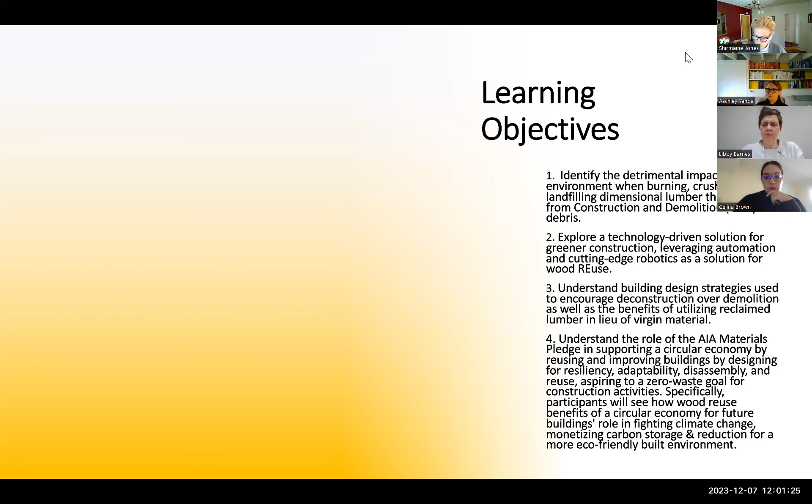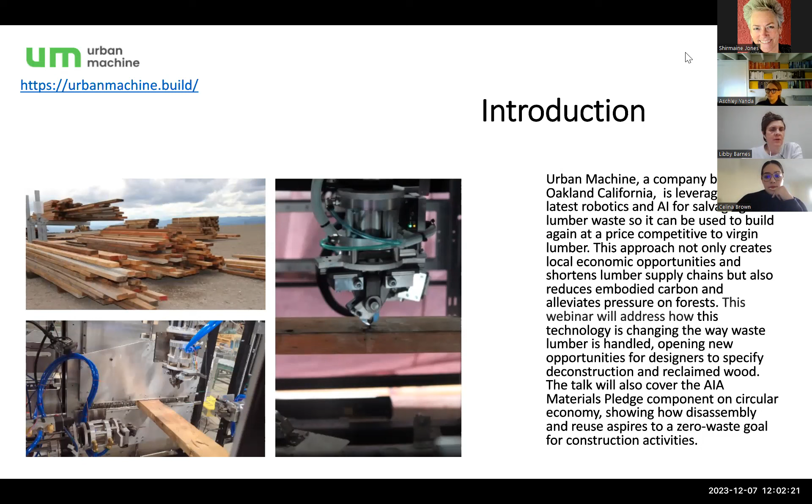Urban Machine, a company based in Oakland, California, is leveraging the latest robotics and AI for salvaging lumber waste so it can be used to build again at a price competitive to virgin lumber. This approach not only creates local economic opportunities and shortens lumber supply chains, but also reduces embodied carbon and alleviates pressure on forests. This webinar will address how this technology is changing the way waste lumber is handled, opening new opportunities for designers to specify deconstruction and reclaimed wood. The talk will also cover the AIA Materials Pledge component on circular economy, showing how disassembly and reuse aspires to a zero waste goal for construction activities.

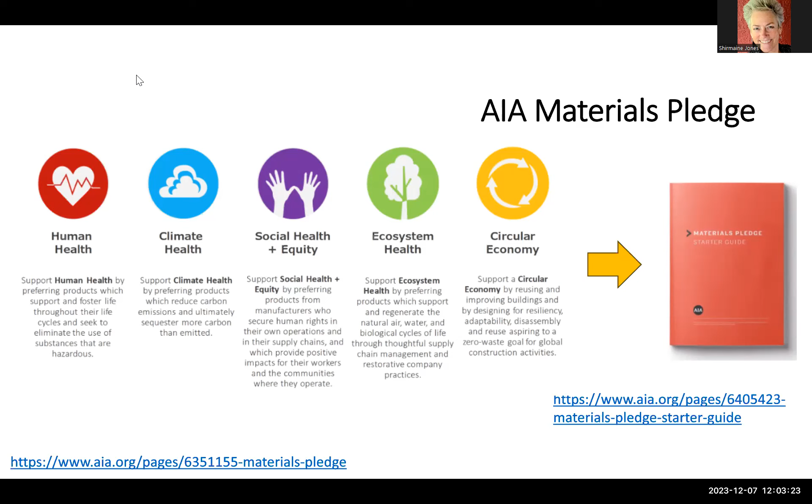Circular economy. The Ellen MacArthur Foundation, a nonprofit promoting circular economies, lays out 3 principles for circularity: eliminating waste and pollution, circulating products and materials at their highest value, and regenerating nature. The building sector, as it is structured today, remains largely intractable on all 3 principles. Construction and demolition debris amount for about 30% of all waste produced globally. It is estimated that 75% of all the waste still has some residual usefulness.

This suggests 2 avenues of opportunities for the building industry: innovate in the decommissioning process, removing assemblies or systems in ways that leave them intact for other immediate applications. The second is to build more horizontal integrations with other sectors so we can become part of their circular loops of materials and they become part of ours.

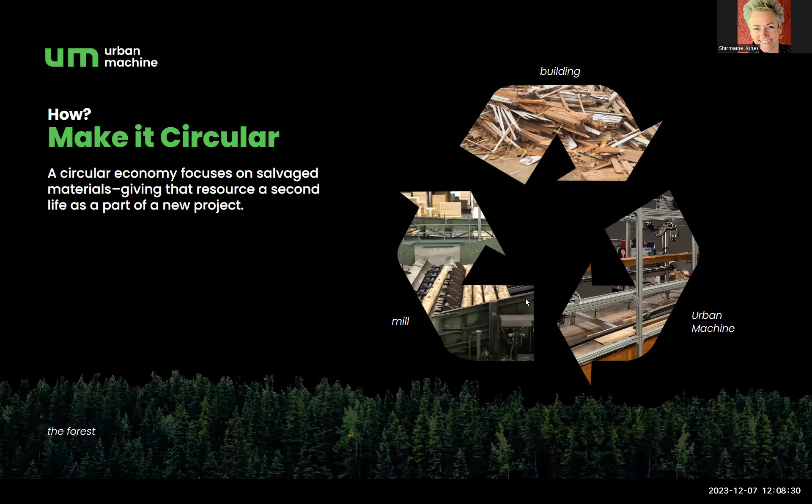As I mentioned previously, dimensional lumber from C&D waste is currently either landfilled, burned, crushed for mulch, or reclaimed and kept in its dimensional form, all of which factor into sequestration.

When the wood is disposed of in a landfill, it often decomposes faster than indoors due to the fungi and insects. And when wood breaks down, carbon dioxide is not the only greenhouse gas released back into the atmosphere. Methane, which is 25 times more potent than carbon dioxide, is also present, making it a much more immediate global warming effect.

When wood is burned, it's no longer carbon storage, of course, and you also increase carbon dioxide concentrations in the atmosphere, actually by more than if you had used fossil fuels, and thereby contribute to climate change.

When wood is ground into mulch, the mulch will continue to store carbon, which is good, but not for as long as reclaimed wood because of the smaller size. Wood mulch also tends to decompose faster than solid wood.

So that brings us to the final method, our preferable method, which is to reclaim the wood and keep it in its dimensional form. It's suitable for reuse. It can be put right back into a new project. And of course, the reclaimed wood gets to keep its carbon storage role.

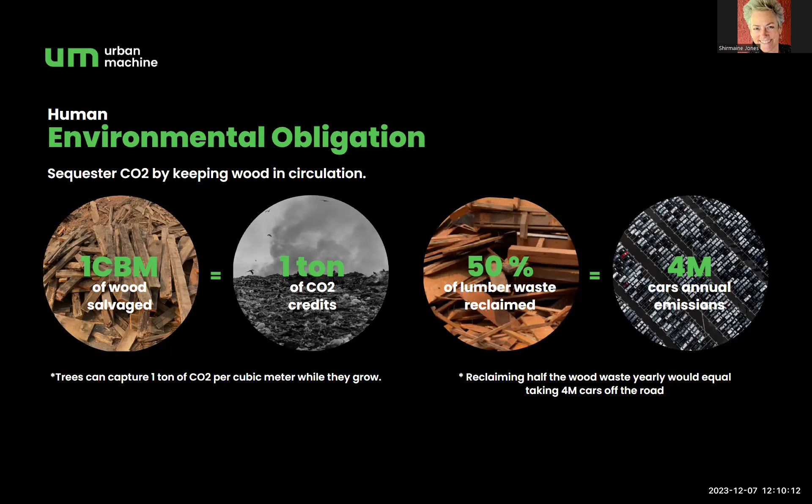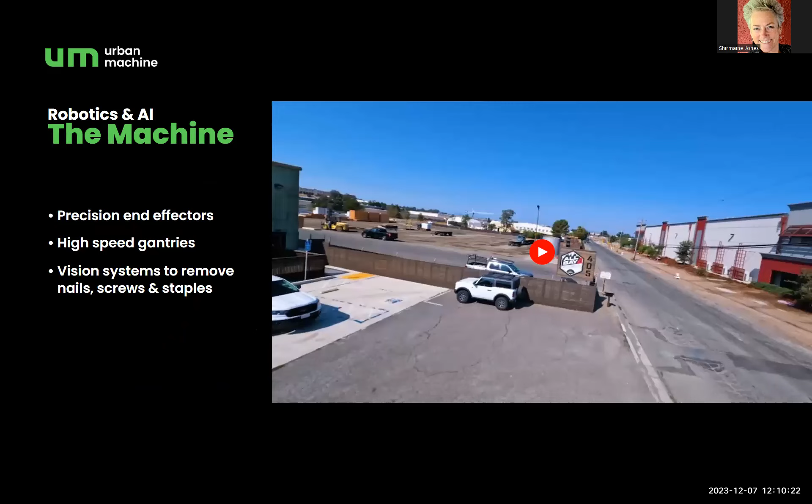So moving from the problem now to the solution, I'd like to take a look at our nail pulling robot. I'm going to go ahead and play this video and just kind of chat through what's happening.

It's a drone video that was taken out at All Bay Lumber Company in American Canyon, where we had about a 2-month pilot project this past fall. You'll see the drone zooming around some of the lumber stacks that we have out there, and then the machine in action.

Oh, and I'll turn this down so you can hear me. So the machine is 80 feet long. When it's all assembled, it's modular, so it can be transported on 2 40-foot trailers.

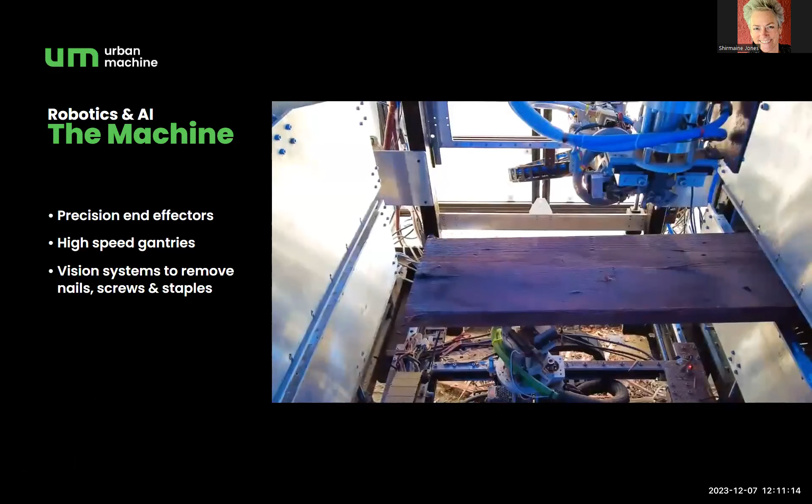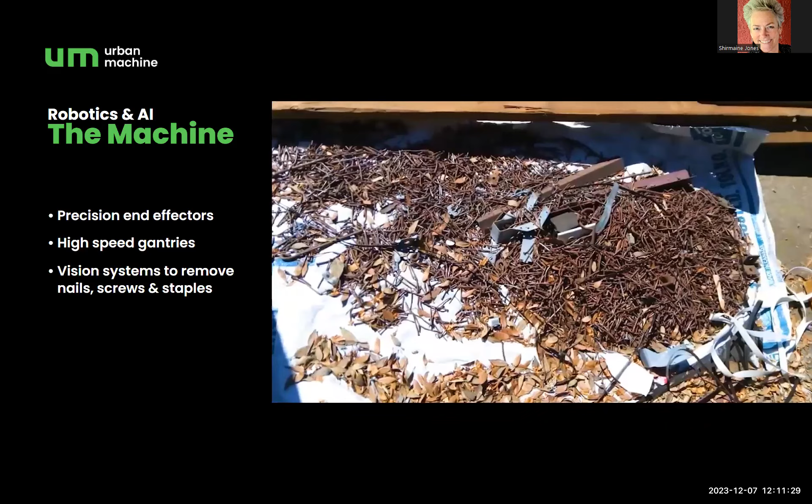The wood starts at brushing systems, which polishes the metal, making it easier for the cameras to see. That lets the AI technology know where it is. So then the flashing that you see comes from the cameras looking for that material, learning what kind of metal it is. And then it directs the bird beak pickers working on all 4 sides of the wood at the same time. It then finally goes through a metal detector to be sure the wood is clean and metal free.

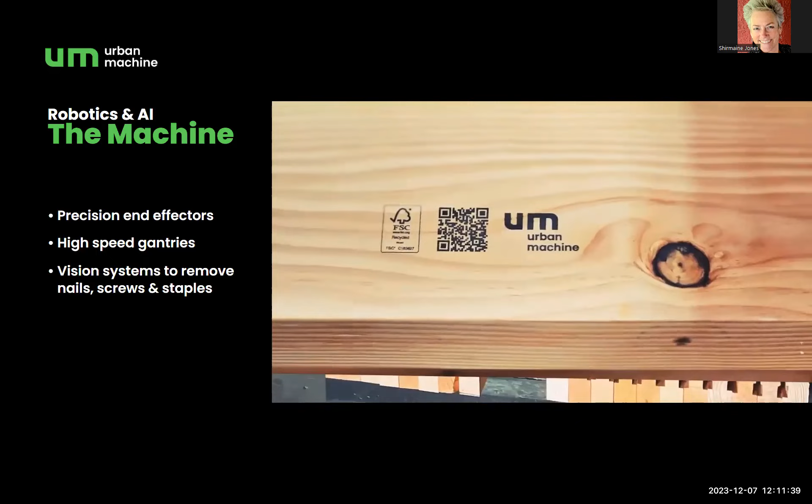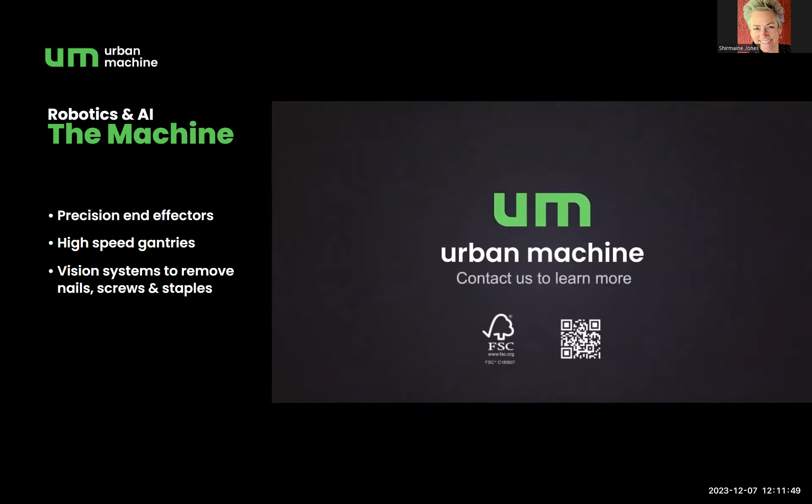We do process 2 main types of wood, both solid timber as well as glulam, from 2x4s all the way up to 6x18s. Our core scope is really just getting that metal out. So once the wood is metal free, back into the wood supply chain it goes, and you can use it in your projects.

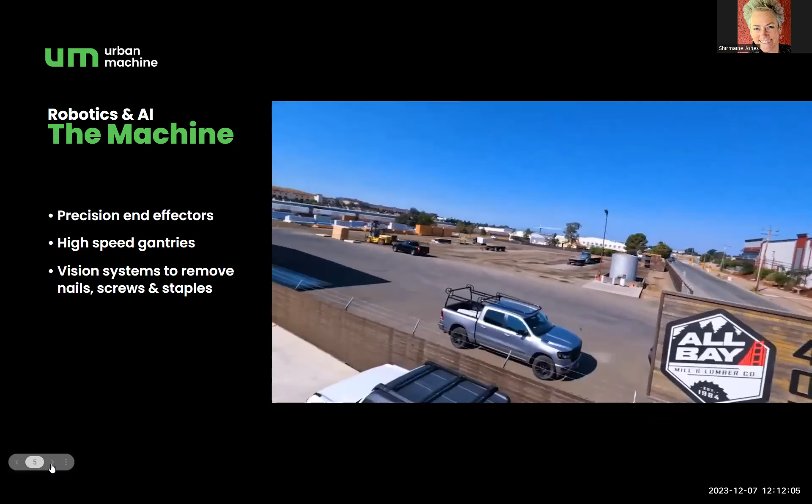So right now we have 1 robot working full-time as our central pilot program. We'll be wrapping that up 2 weeks from now. We're currently deployed out at Green Waste Zanker Resource and Recovery Center in San Jose, one of the largest construction and demolition recycling plants in the entire country. We're there pulling out the high quality dimensional lumber from the tipping floor in order to denail it and then send it back into the wood economy for reuse.

Our goal ultimately is to have machines operating in 10 additional metropolitan areas within the next year, and then scale up significantly in the next few years, both nationally and internationally.

We feel it's important that we have these machines available in multiple locations so that the full cycle stays within an intended 100 to 200 mile radius. For instance, a building is deconstructed in the Bay Area, it's then denailed in the Bay Area, and it's reused in the Bay Area. This is in contrast with virgin lumber, which travels on average thousands of miles. So the hope would be for it to stay in a regional location.

And then, as I mentioned, it is mobile. So if it's a Bay Area machine, it could be deployed to Zanker, where it is now, for a couple of months. It could then go to a job site for a few weeks, a large commercial job site that may be coming down, and then back to another waste facility in the area. But the goal would be to keep the machine within that same region, and all of that material coming in and going out is in that same general location.

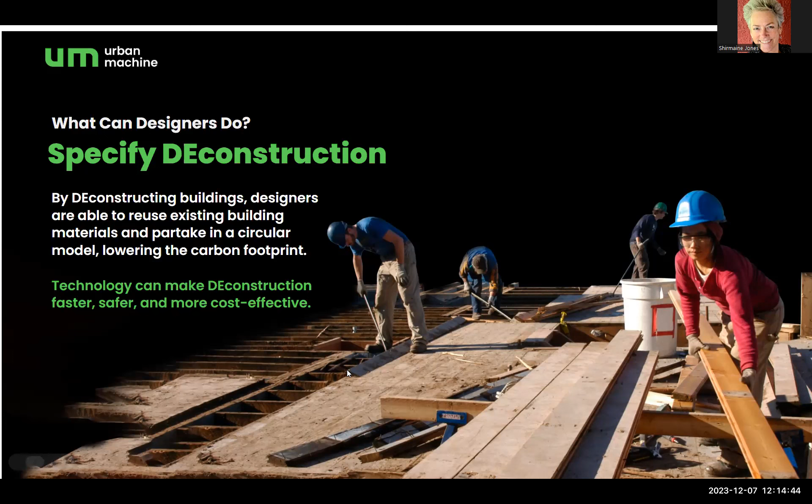Currently, demo contractors take an excavator more or less and smash the building. The reason being that the only financial incentive they have is to minimize costs. So they're breaking it up into small pieces to minimize the trucks to the landfills, minimize the tipping fees they're paying at the landfills. We want to change the economics here by bringing down the cost to denail and clean up this material so that it can then go back into the supply chain, switching from being a cost to contractors to a potential revenue source.

That's something we're working to do right now. While we're in our research and development phase, we're iterating on the technology, but we're also proving that there's an economic model for reclaimed lumber, and that the value is actually higher than using it for mulch or burning it for fuel.

So the specs here are a huge component. That's ultimately what the contractors are going to follow. Having these early conversations with the owner operators and decision makers and getting that into the design plan before the building even comes down is very important. We've included a couple of QR codes here with some general deconstruction specifications that you can access and utilize to start doing this right away.

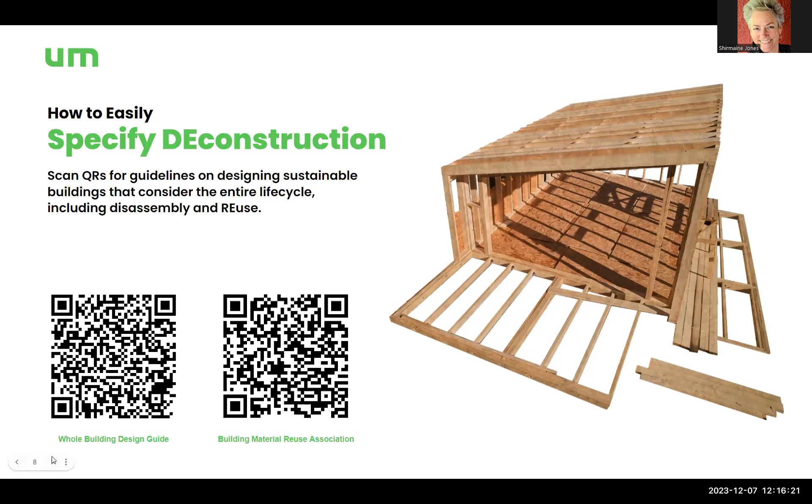The next ask for you as designers is to specify reclaimed material as your preferred type of wood. Our goal as a technology provider is to bring that cost down, as I mentioned, for reclaiming the lumber so that it can compete with virgin lumber.

We might get into this in questions and answers, but currently in Washington and Oregon, wood that comes out of a building, that was used for structural purposes, can be reused automatically structurally. So assuming you have access to the as-built original information, and that wood was rated as No. 2 or better in Oregon and Washington, you can automatically put that into a new building.

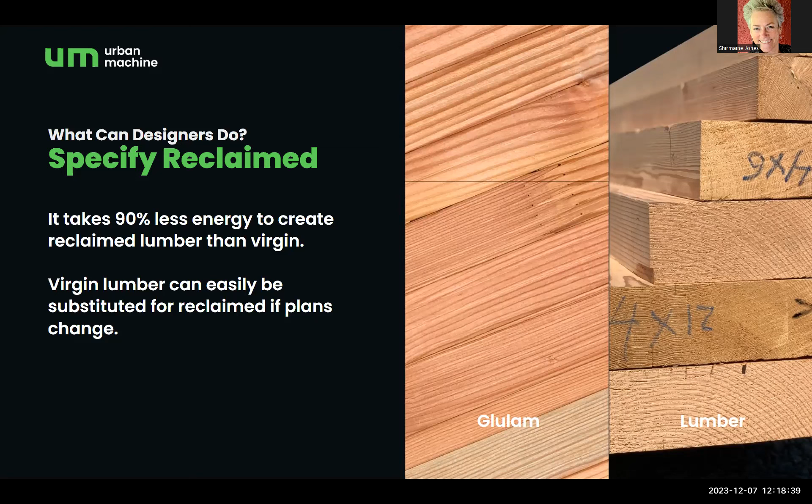It's not automatic—you don't have the automatic ability to put that into a new building. You do need to have it structurally regraded, but that's a step that can be taken. So it can be used in many different applications, structurally being one of them. It just needs to be regraded right now in California, but we are working with several folks to try to update our codes similar to Washington and Oregon, because that's kind of a great hurdle to take down and make it more accessible.

And finally, to wrap up along those same lines, I wanted to touch on a great application for reuse in projects: dowel laminated timber, or DLT. We're currently working with folks in the forestry department at UC Berkeley, designing our own panels utilizing reclaimed material. There's no glue and there's no nails—it's just lumber. So for us, we think it's the ultimate circular story.

This could be used for flooring, wall partitions, panels, roofing. DLT can be utilized in everything, of course, from small TIs and build-outs to large ground-up projects. This is currently being utilized in other countries, although it's not typically being used with reclaimed lumber, and it's not being produced at scale in the US right now, which is what we'd like to see as we continue to move our technology forward.